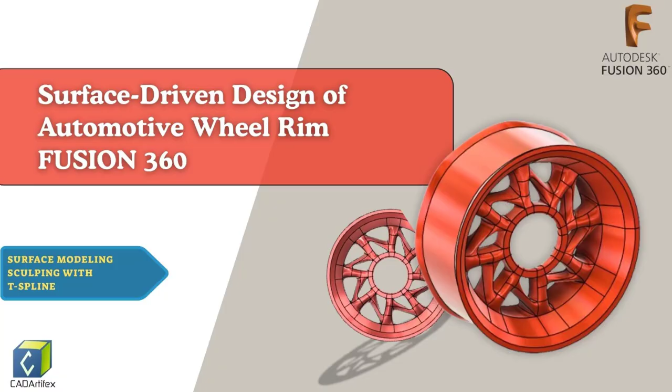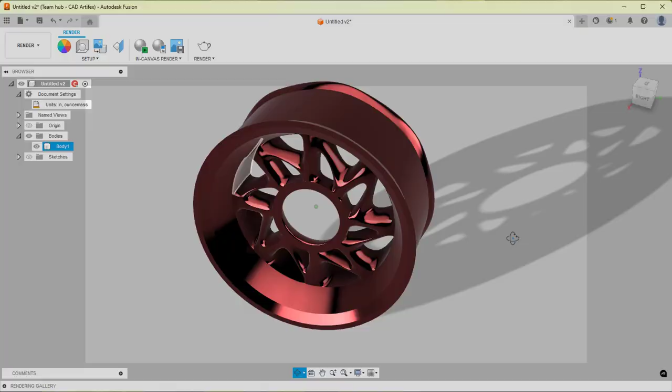Welcome to the channel. In this video, we are going to design a wheel rim in Fusion 360 using surface modeling techniques. Surface modeling gives the flexibility to create smooth, complex, and visually appealing shapes that are difficult to achieve with solid modeling alone. By the end of this tutorial, you will understand the workflow to model rims with precision and creativity, perfect for both beginners and advanced users exploring surface design.

So let's begin. We'll be creating this model in inches since wheel rim dimensions are generally specified in inches in real world design and manufacturing. So change to inches if you're using any other dimension.

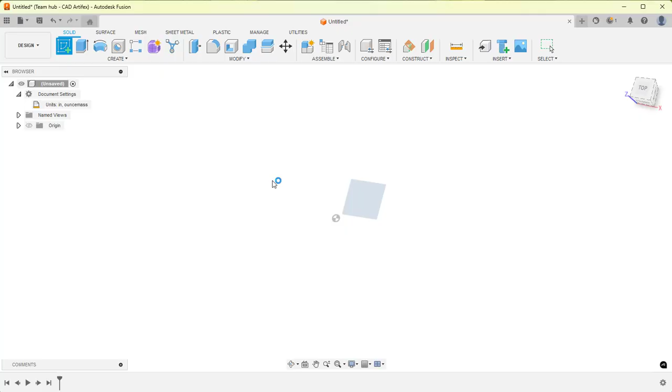First, let's create the rim flange, that is the outer base of the rim wheel. In the top plane, let's draw a vertical and horizontal center line. Now change it to construction line.

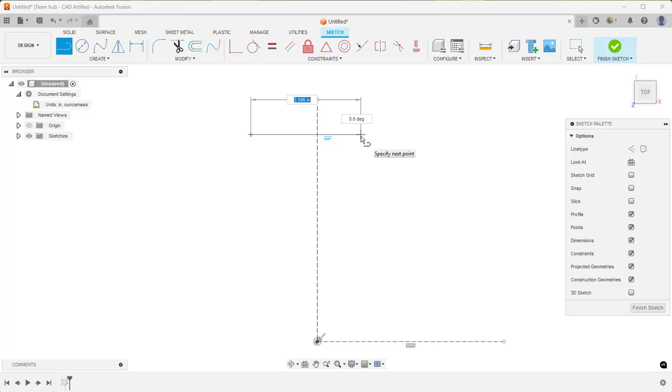Then approximately from here, draw a horizontal line, then an inclined line, again an angle line, then vertical line. Now to this side, draw an angle line, then vertical line.

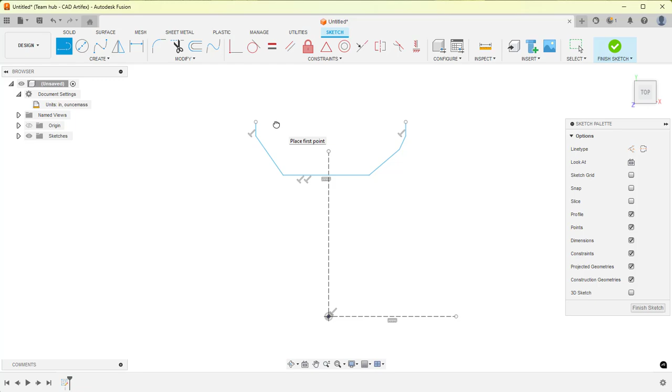Now let's give constraints. Make this a point and this also horizontally aligned. Now take the midpoint and make it center.

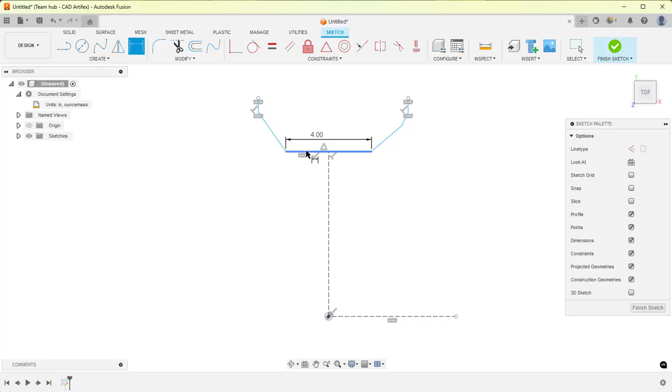Now let's give dimensions. The width, let's give as 4 inches, and this height is 2, and the small line, the length is 0.5 inch.

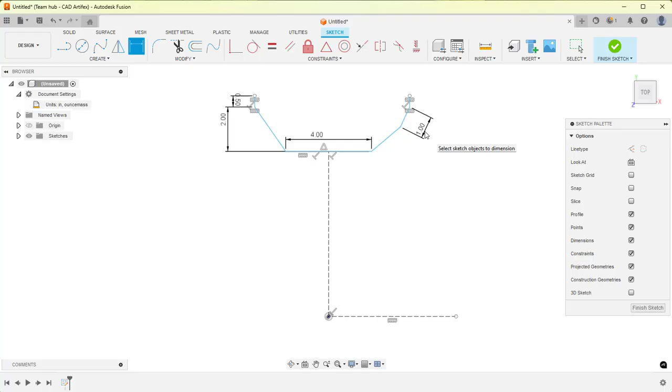Now to this side, the length of the small angle line is 1, and the angle is 143.

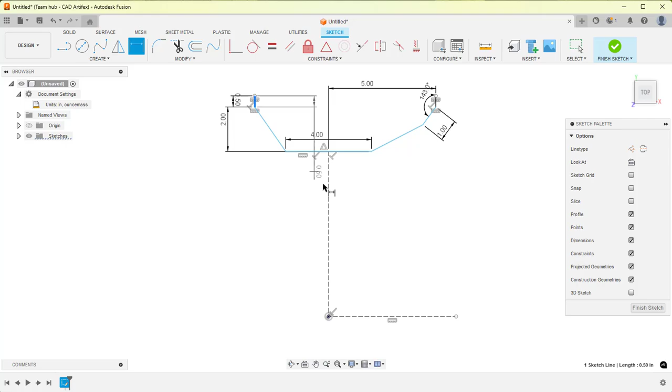Now this distance let's give as 5, and to this side let's give as

3.75. Now let's give diameter dimension since we are going to revolve this. Right click and choose diameter dimension. Let's give diameter as 15 inches.

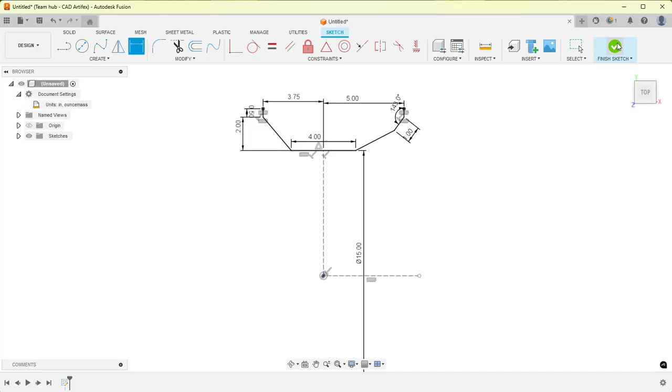Now we can go to form. Invoke create form, and in create, select revolve. For profile, select this, and for axis, you can select the center line. Here we can define the faces and symmetry.

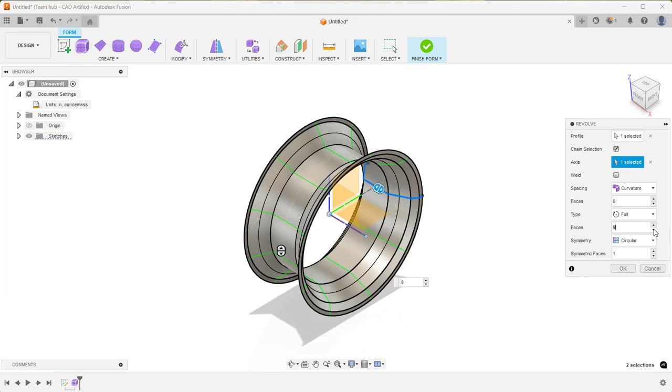In symmetry, give circular, and faces 8. Type is full. 8 will be enough. And in symmetrical faces, let's give as 3.

When you are creating more complex shapes, you can add more faces. Here, let's make it simple. This will be enough.

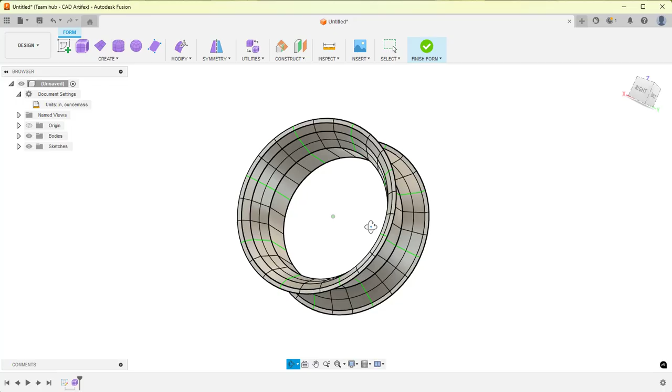Now let's draw the inner disc of the rim. Take cylinder and select right plane. Change your orientation to right view, and from origin, draw a cylinder of any diameter. Here we can specify all parameters.

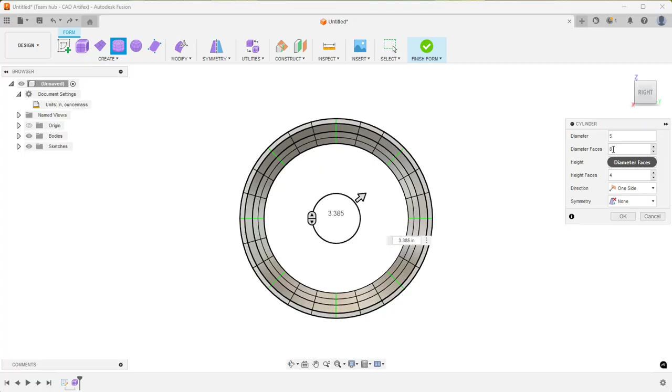Diameter, let's give as 5, and diameter faces, we will give the same diameter faces as the outer ring, 8. Height, we will give as 2.5, and height face is 1. Symmetry, let's take circular, and in symmetric face we'll give 3.

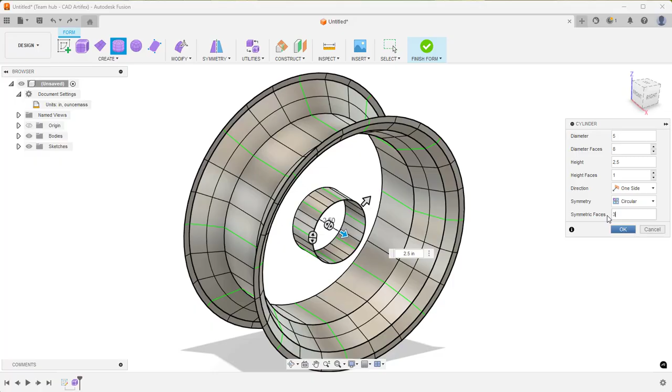Yes, this will be enough for us. Now let's give flange to the inner disc.

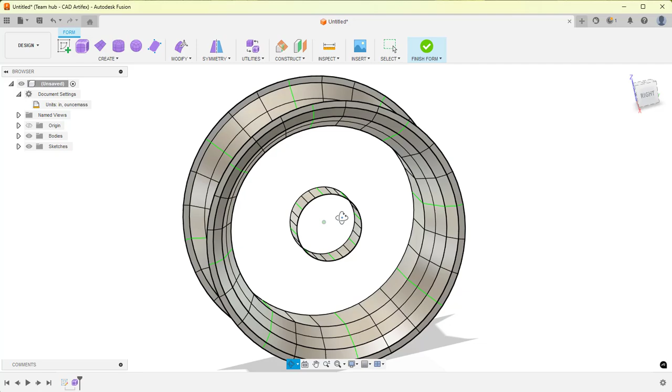For that we will double click the outer edge. Now all the edges are selected. And click on edit form. Here you have to press the Alt key and give a small flange, approximately this distance.

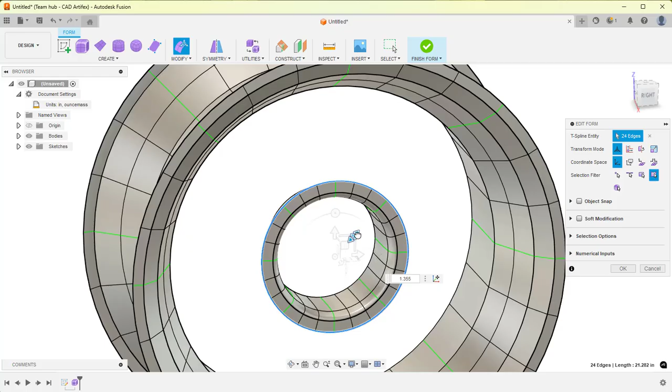Then press Ctrl and Alt key and drag the arrow to a distance of 1.5 approximately. Then downwards, press Ctrl and Alt key together to a distance of about 1. Yes, this will be enough.

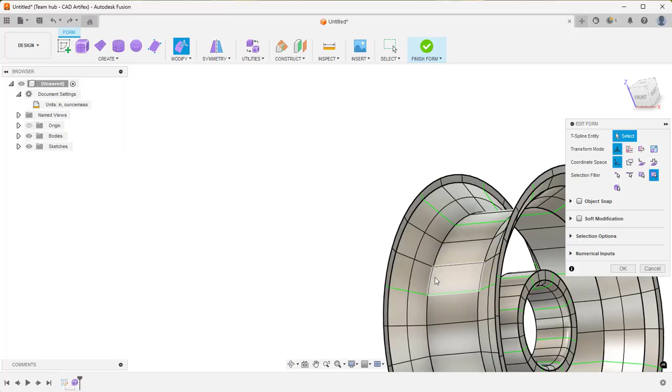Now our ring is taking shape. Now we have to draw the rim. For that, let's take the front plane. I'm checking on slice from sketch palette so it will be easier to sketch. You can press P key from your keyboard.

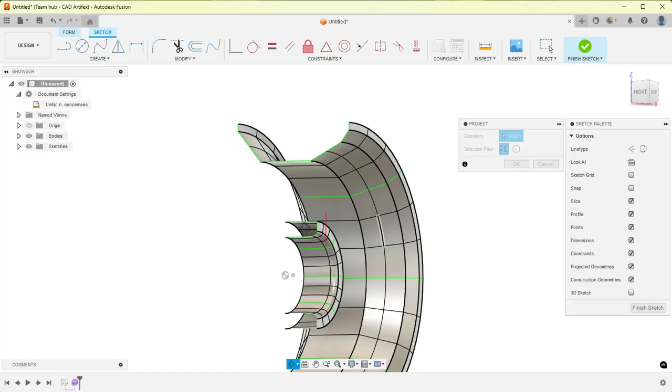Let's project this face, and select this face. Now we got the vertices. Now we can connect the curve we are going to create.

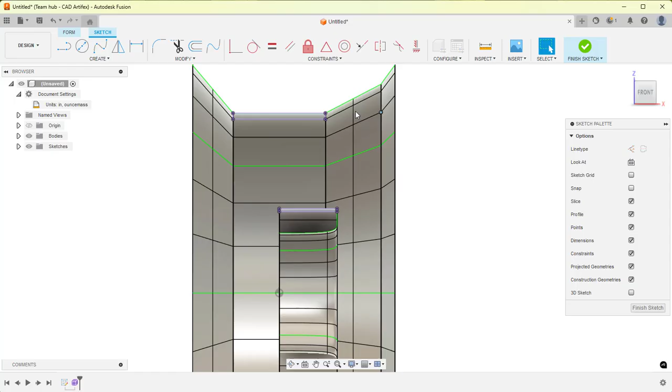Invoke spline, select this top vertex and this vertex. And let's give shape.

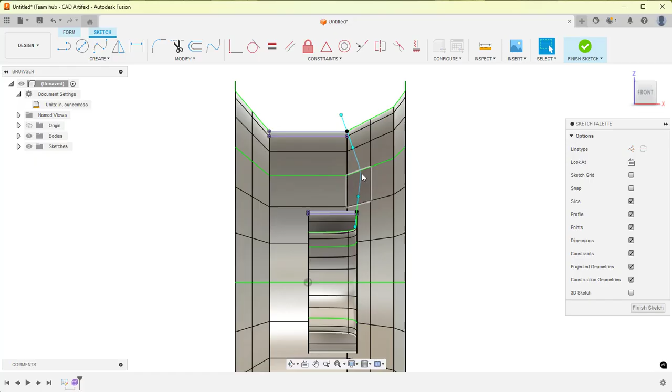You can adjust the spline. This will be enough. Depending on the design, you can change the shape.

Now we are going to connect both rings. For that, invoke bridge. Select this face

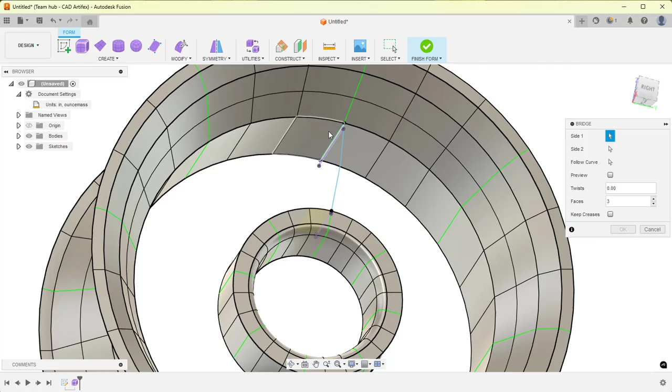and this left side face of the curve. In follow curve, select the spline. You can flip the direction so that the faces follow the curves. You can check on keep crease.

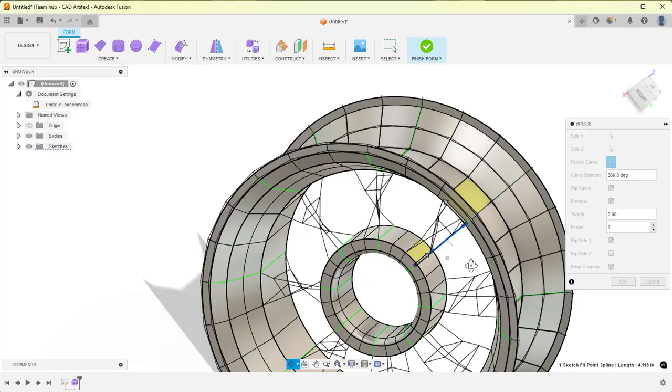So the rim is created.

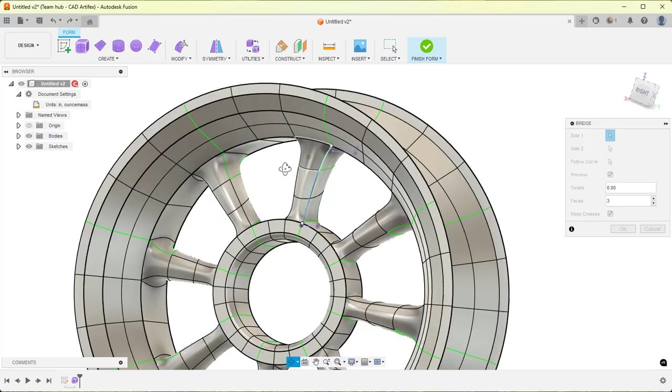Now let's add one more branch to the rim. Invoke bridge and select these corner two faces. Select flip side checkbox and keep crease. Finally we have got this form.

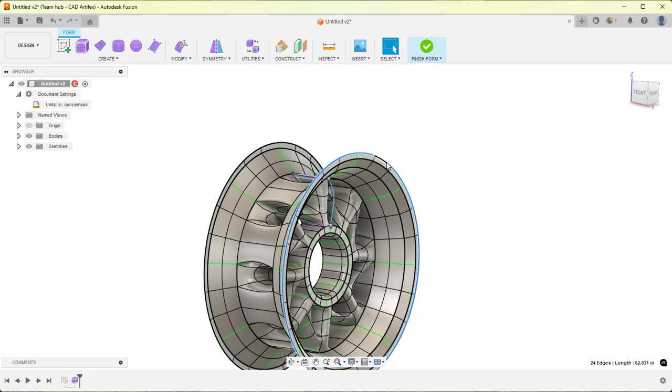Yes, this is exactly what I need. Now let's close this outer flange. Double click on the outer edge.

Invoke edit form. And on this translation arrow, press Ctrl and Alt key, then drag to a distance of -1. Now press Ctrl key only and drag the arrow approximately this much.

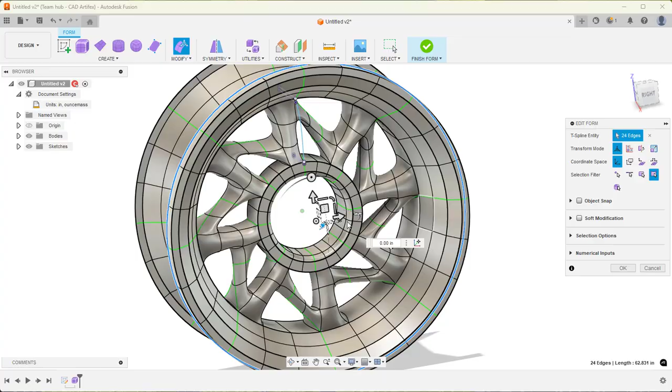Now press Ctrl and Alt key to drag the face till this much.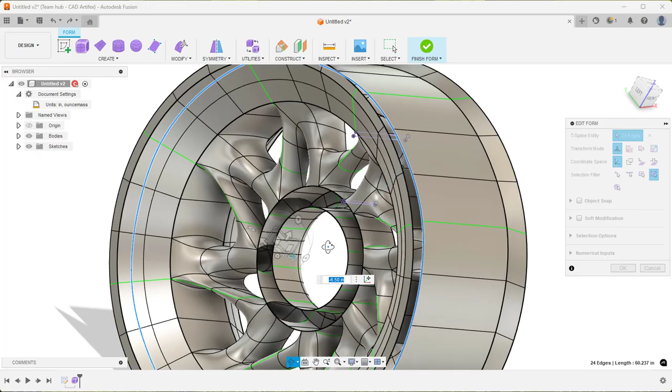And from here, press Ctrl and Alt key again, and drag this arrow to create the face outward.

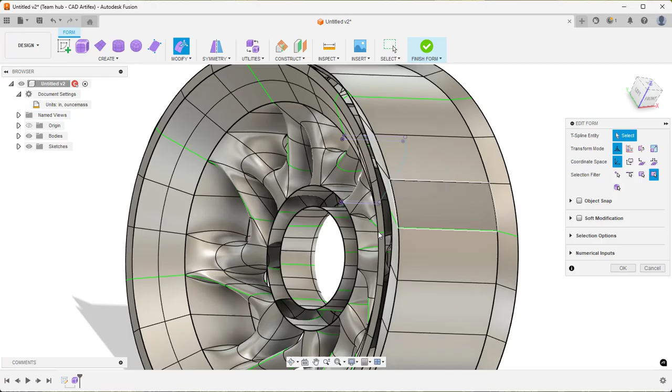Now press Ctrl key only. You have to drag the right side arrow. Now we can close this by giving merge edge.

Double click on the first edge and select the second edge from the dialog box, and double click on the outer edge. Now the rim flange is closed.

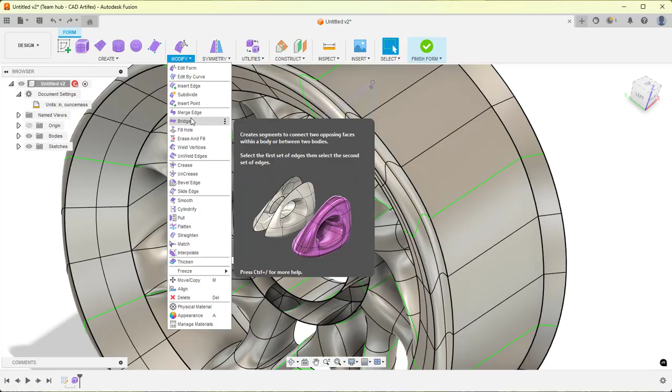Now we also have to close this one. For that, invoke merge edge, double click the second edge, double click. So finally we have achieved the model.

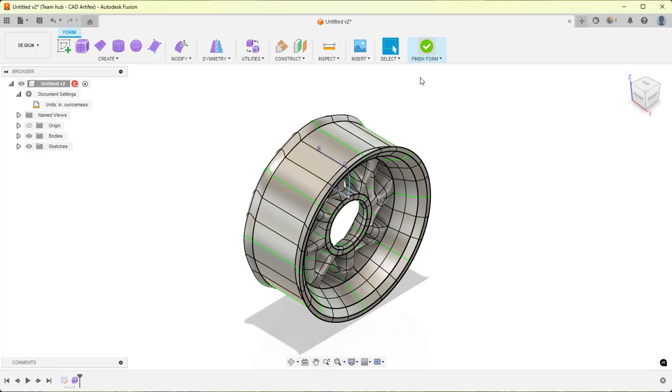This is our complete model, and let's finish the form and switch back to the solid workspace. Since we have created closed surfaces, Fusion 360 will automatically convert them into a solid body, so there is no need to manually add thickness.

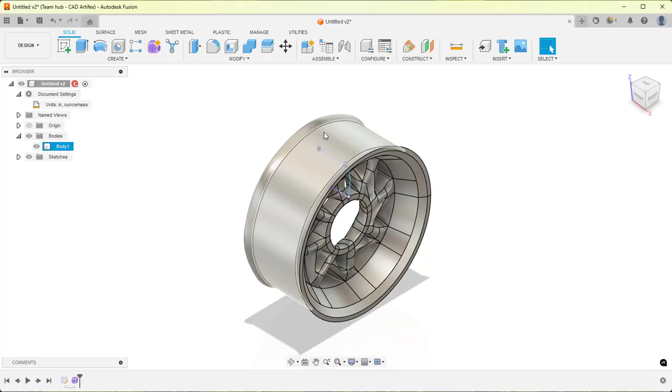If we check in section view, you can clearly see it's a solid. And that's how you create a wheel rim using surface modeling. You can also enhance it further by adding appearance for a realistic look.

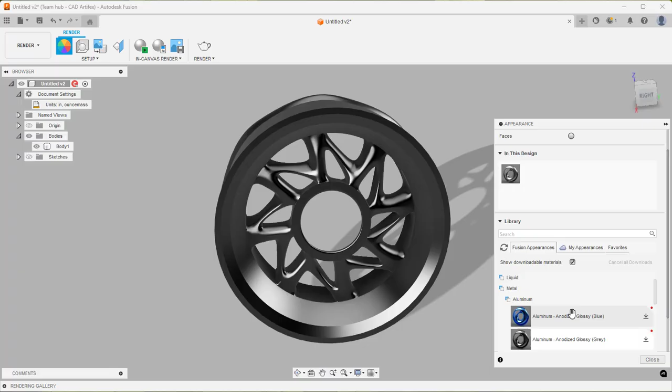Let me go to the render workspace, and in appearance, let's take aluminum and drag and drop the aluminum.

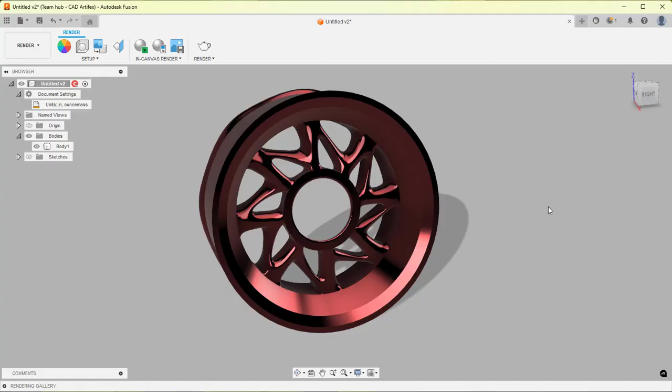So that's the complete process of designing a wheel rim in Fusion 360 using surface modeling. With closed surfaces automatically converting into solid, the workflow becomes smooth and efficient. You can further refine the model by adding appearance for a more realistic finish.